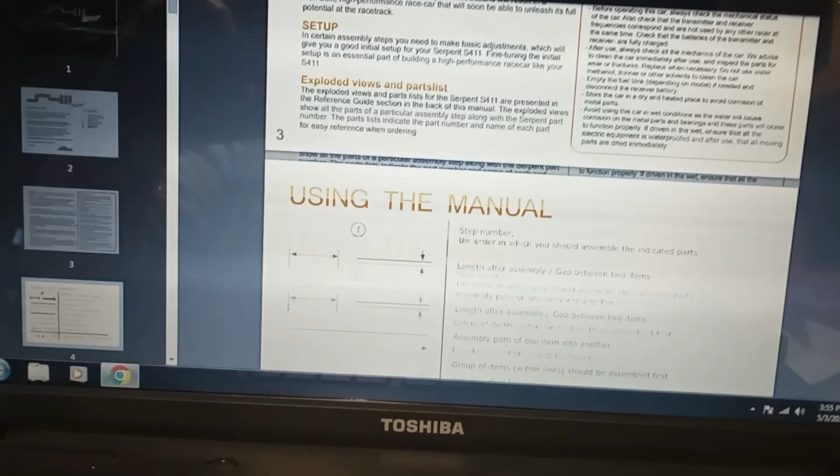And so it brings that up, and it's every single page of the manual for the build of this car. There it is, once it's finished, or a CAD drawing. But highly detailed, very detailed, 60 pages worth, as you can see.

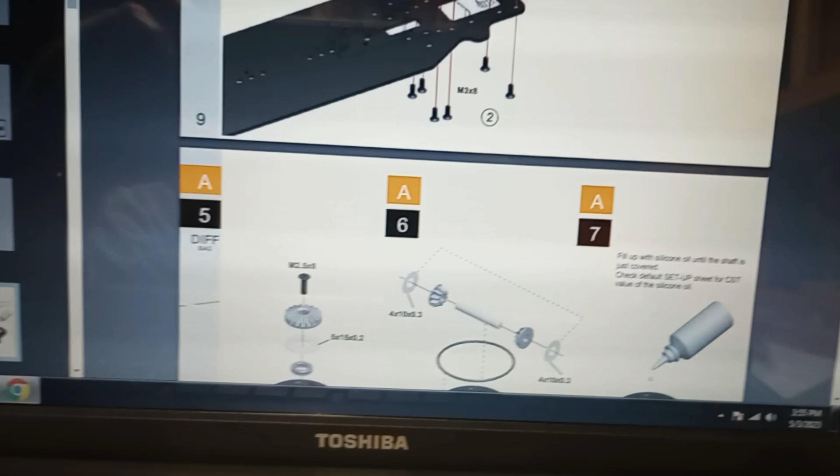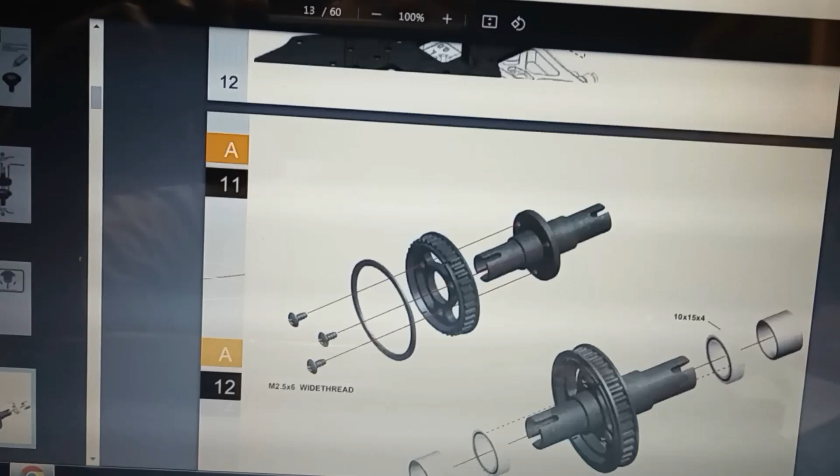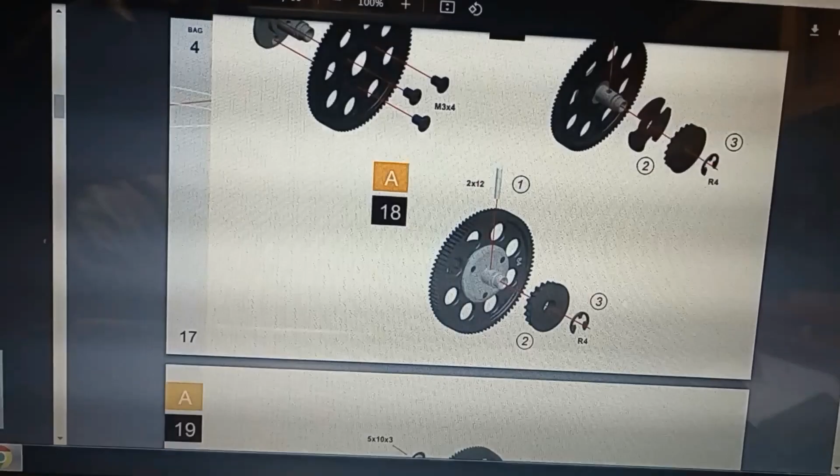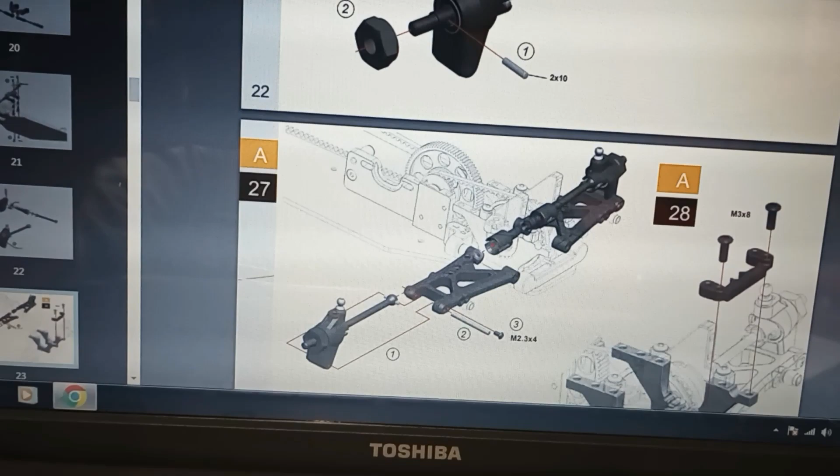This is something like I've never seen before. There's the rear diff with the belt, as you can see, and then this is assembling the front diff, and there's another belt that has to go on it. Really, really fascinating to me, man, because that is super cool to have that kind of access instead of having to flip through a manual and risk spilling stuff all over it because I'm a clumsy, you know what.

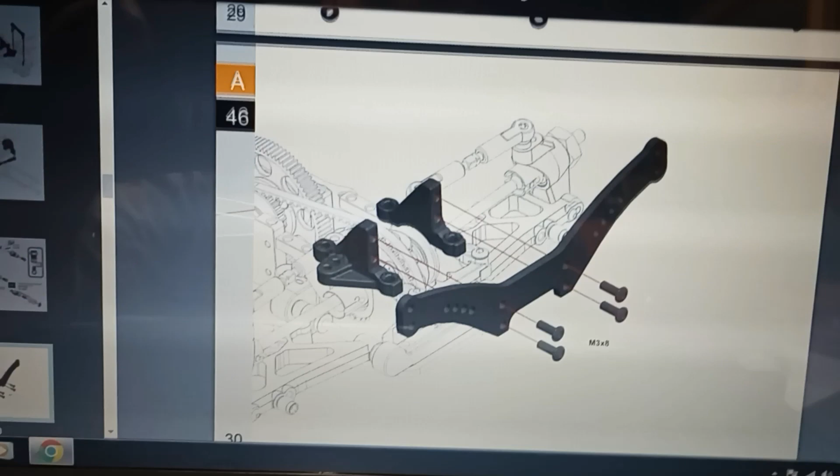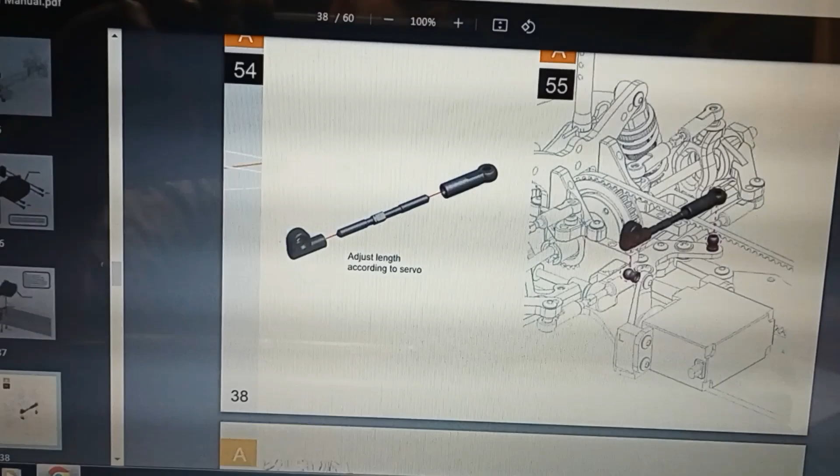So this is going to be one fun build, from the actual build aspect, and the fact of having to do it off his computer kind of makes it, to a nerd like myself, it's just got a huge wow factor. I know it's probably doesn't make a hill of beans to anybody else, but I think it's super cool. And I cannot wait to get started on this thing.

Will I get started on it? I'm not exactly sure. I'm not going to start on it tonight. I've got parts that are on the way today for the holiday buggy. We've got parts coming in between Saturday and Monday for two other vehicles, one being the SMT10 Monster, and of all things, that red Volkswagen. Here we go again, the red Volkswagen right there. So I may start on this Saturday. Not sure, depends on if we have anything planned. If not, I'm going to hold this right now until I plan a little more on which direction.

I'm thinking I've got the right body. So I'm going to repurpose a body, but it's a body that I really, really like, and I hate to just see it sit around. And I've already got a set of wheels that will complement it. Will it be effective as a race platform? Probably not, but I can always pick up a set of race tires and wheels down at the hobby shop because he's got a wall full right now.

But Otto, thank you for letting me buy this car. Thank you for that gorgeous orange body back there. And just thanks, man. Thanks for listening to me, and thanks for allowing me to enjoy this hobby with good people of like mind, and just good people, period.